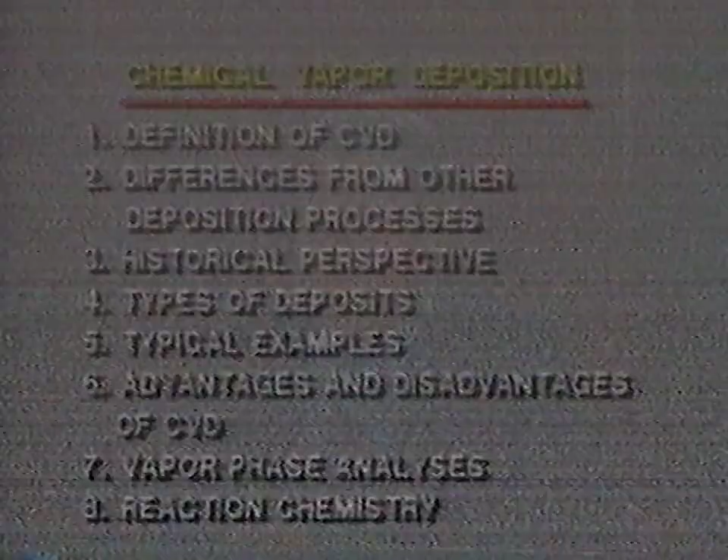Now, the types of deposits we can obtain by CVD cover a very wide range, as we will see. They can go from dielectrics to semiconductors, metals—it's a very large variety. Essentially, almost any type of inorganic material can be deposited by CVD methods.

The examples we will see in a moment, so let's skip to the advantages. Why would we want to use CVD? CVD is primarily a process where we can deposit materials at very low temperatures compared to their melting point. It's a very versatile method which allows the synthesis of many different types of compositions fairly readily and at low temperature.

The disadvantage with CVD is that we are restricted to materials that are available, that can be introduced into the gas phase and can be reacted. Another drawback is the fact that we have to use, in many cases, toxic materials which are corrosive, poisonous, and so on. So we have to have careful control over those processes.

In order to know what's really happening during the process, we have to do a vapor phase analysis. Simple analysis of the end product gives us some clues of what may happen during the process, but unless we do an in situ analysis using mass spectroscopy, Raman spectroscopy, optical techniques, and so on, we don't really know what is happening during the process itself. Instrumentation has been perfected in recent years to achieve that kind of understanding.

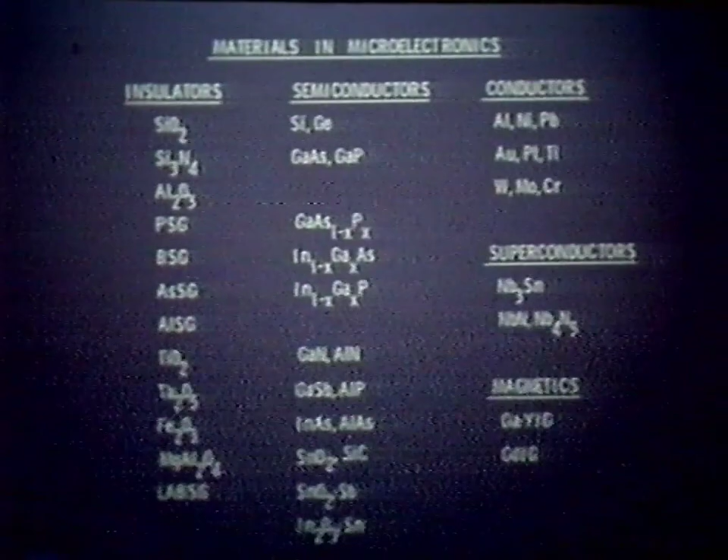The conductors generally are preferably done by physical methods of deposition, except the refractory metals—in this case tungsten, molybdenum—which are preferably done by the CVD method. The superconductors and magnetics, I'm just listing those for completeness, but they again are being prepared by CVD. Let's have a look at some of the basic aspects of CVD reactions as listed in this table.

First, the vapor pressure or volatility requirements are such that they should be high for the reactants, in order to transport them to the site of the reaction at the substrate surface. They should be high for side products to be eliminated, and of course low for the product to remain. This means gases are preferable in most cases, since you don't have vapor pressure problems, whereas with a liquid you have to vaporize it first, heating it to produce sufficient vapor pressure to get the necessary quantity into the reactor. If it's a solid, it's even more difficult, because you have to melt the solid to a liquid and transport the vapor through a heated conducting system into the reactor—sometimes difficult, but perhaps necessary if there's no other choice.

Now, the reaction energy under B: the types of reaction energy can be thermal energy, simple heating, as in most chemical reactions, or it can be an electric discharge such as a plasma glow discharge, or electromagnetic radiation such as electron flux, laser radiation, or photon radiation of any type. All of those are means to get the reaction going.

Under C, nucleation and film growth, there are two major aspects: homogeneous reactions, which occur uniformly in the gas phase—these are the ones we don't want, because they lead in most cases to gas phase nucleation of particles. The second type is heterogeneous reaction, which is selective and proceeds on the substrate surface, and that is the one we wish to control and obtain. We'll see more about these two reactions shortly.

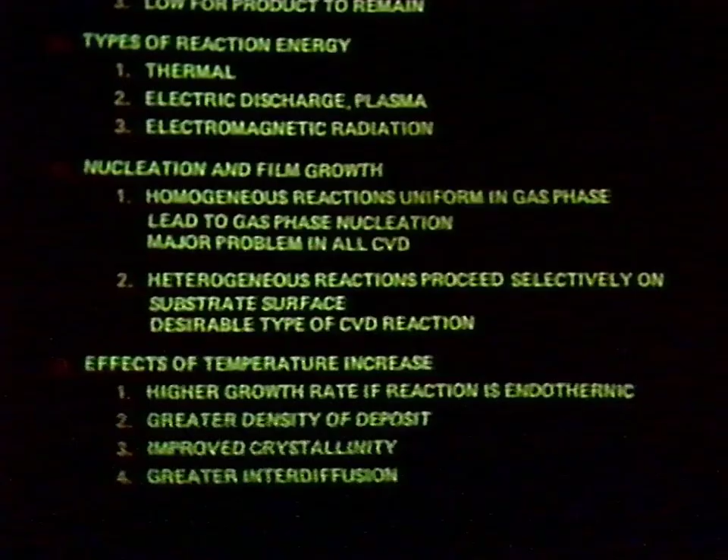Finally, the effect of temperature. Generally, a temperature increase produces a higher growth rate if the reaction is endothermic, as most chemical reactions would be. Greater density of the deposit also results from increased heating, and another effect is improved crystallinity. In epitaxy, for example, where we want a very good, perfect single crystal material, we have to go to a high enough temperature to achieve this. On the other hand, we also have negative problems such as greater interdiffusion, the diffusion of impurities, as we increase temperature.

Now let's look at some of the fundamental principles involved in CVD. They are listed here, starting with reaction chemistry—we will look at a few examples of those in a moment. The reaction chemistry is essentially straightforward inorganic physical chemistry without particular problems, except that everything takes place in the gas phase.

We have the gas-phase homogeneous reactions I just mentioned, and the surface heterogeneous reactions, which are the ones we really want. We can really say that the CVD method is more of a surface reaction method than a vapor phase reaction, because what we really want is the heterogeneous type of reaction, which occurs at the surface of the substrate.

The fourth thing is thermodynamics, and we will have a brief look at some thermodynamic considerations, then go on to kinetics and energy, mass, and momentum transport. All of these are very important in the reactions, in reactor design, and in maintaining conditions that lead to optimum results. Heat transfer is another consideration—from the substrate or from the reactor plate to the substrate, and also into the gaseous reactants of the system.

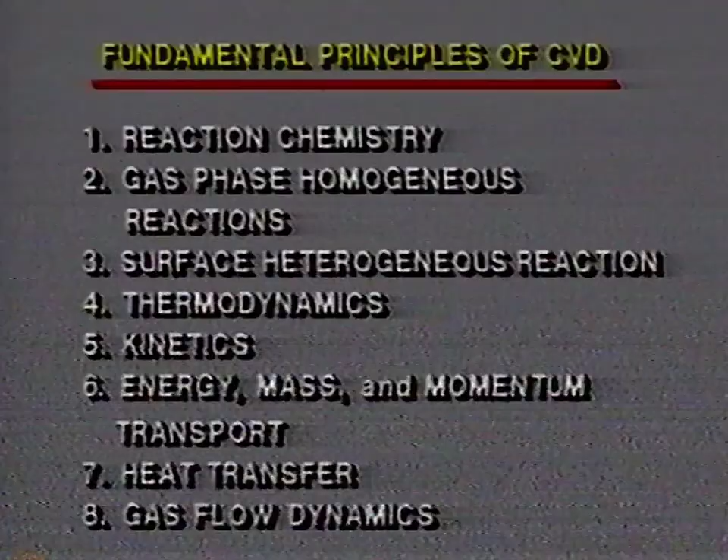Number 8, flow dynamics, is another consideration, as well as pressure effects—pressure, just like temperature, has a pronounced influence on deposition conditions. Nucleation phenomena are a whole separate aspect, a subcategory of the whole CVD theory. There are various aspects of film growth, that is, how the film deposits on substrates as a function of environmental parameters, and finally gas-phase composition analysis. Each of these could be a separate lecture, and to do justice to each it should be, but because of time requirements, we cannot cover more than the first four, or perhaps five, up to kinetics.

Pyrolysis is really a process which is thermal decomposition of a material without any other interaction. In other words, we simply heat silane, and we obtain silicon and hydrogen as a byproduct.

The next one would be reduction, used frequently for the preparation of metals. In this case, we have, for example, tungsten hexafluoride with hydrogen producing tungsten and HF as a byproduct.

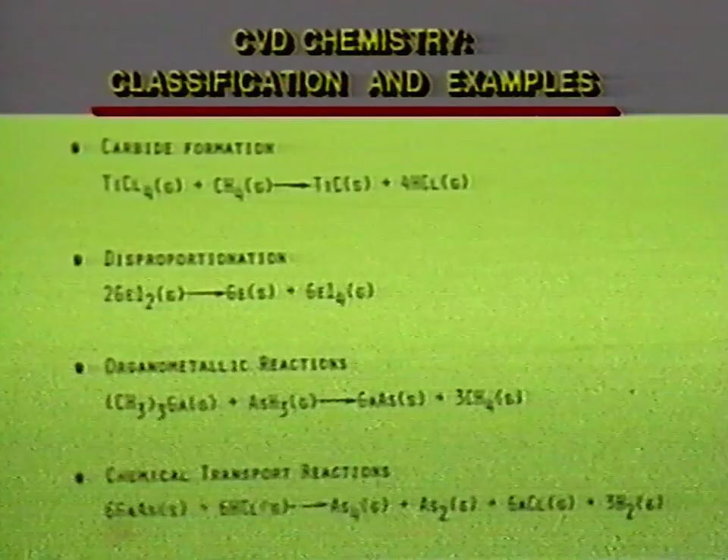Finally, transport reactions, where we transport one material with a suitable transporting agent, such as HCl or water vapor, into another. Here I have gallium arsenide shown with HCl to produce various species of arsenic and gallium chloride. Again, this is a reversible reaction and will depend on the temperature of the system which way it will proceed.

Let's have a closer look at the important homogeneous versus heterogeneous types of reactions using a very simple example, in this case the silane pyrolysis to silicon and hydrogen.

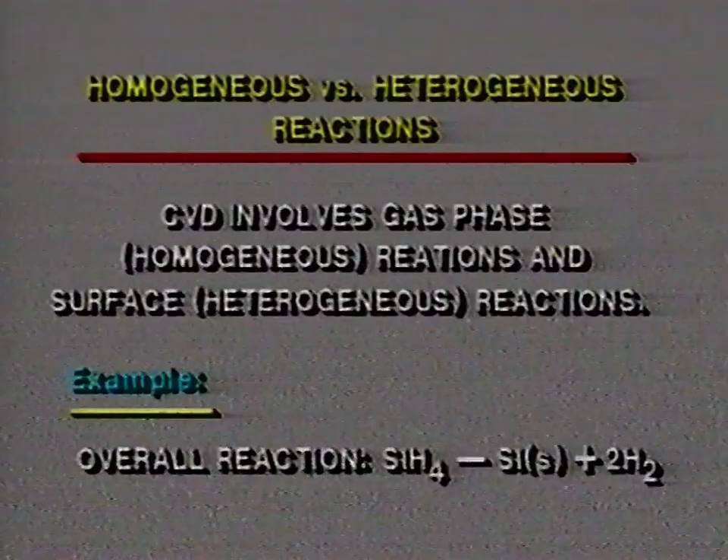We have essentially two types of possibilities: the gas phase reaction or the surface reaction. In the gas phase, silane dissociates to SiH2 and hydrogen, which then reacts further with silane to produce disilane, or Si2H6.

On the surface, on the other hand, we have silane depositing directly as elemental silicon and hydrogen, in all cases, whether it is silane or disilane or the more complex type. So these are the types of reactions which we would like to have, namely the deposition of film on the surface.

Incidentally, in all of this, we are really concerned with the deposition of thin films rather than anything else. And thin films meaning films in the range of a few hundred to a few thousand angstroms, up to perhaps a micron or so for VLSI type applications.

However, CVD can be used for production of bulk materials just as well. I just would like to point that out - it is not restricted to this. But the technology has been perfected to the greatest degree for thin film deposition as used in VLSI.

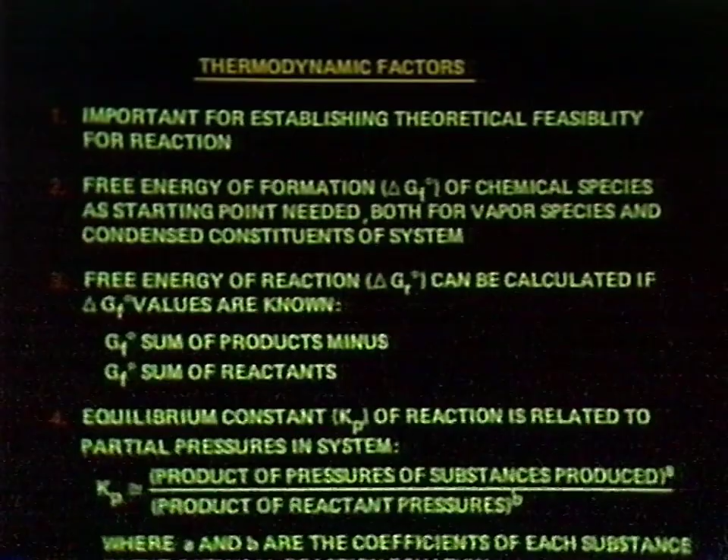The equilibrium constant K sub P of the reaction is related to the partial pressure of the system as shown here. K sub P essentially equals the product of the pressures of the substances produced, raised to the A power, divided by the product of the reactant pressures raised to the B power. A and B are the coefficients of each substance in the chemical reaction equation, the summary equation, as we normally do in physical chemistry.

The free energy of reaction, delta G sub R, and the equilibrium constant K sub P are related by the equation shown.

Consider a general CVD reaction, represented by the equation given here, where A sub G, a gaseous species, plus a species of reactant B, and so on, gives us reaction products M sub S and N sub G, and so on, but where only one of the components is a solid.

If that is the case, we can now calculate by means of the Van't Hoff expression, which relates K sub P, T, the absolute temperature, and delta H by the equation shown. Delta H, incidentally, is the enthalpy of reaction, which can be positive or negative.

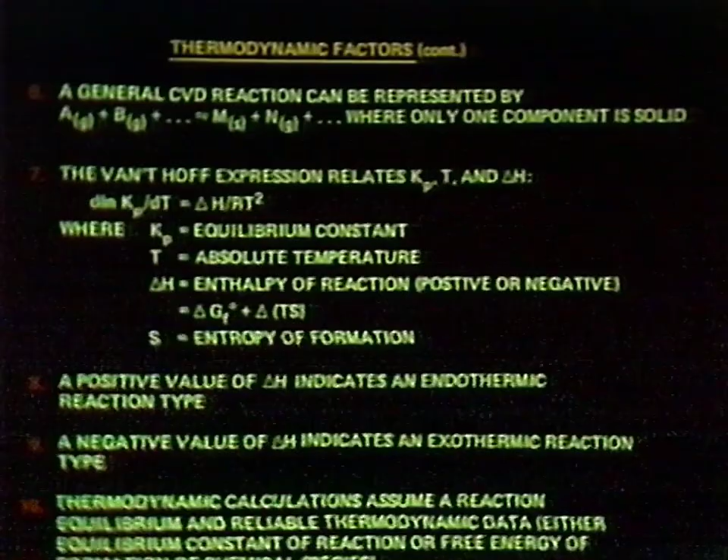The thermodynamic calculations assume a reaction equilibrium, and also assume thermodynamic availability of data, which is not always the case. CVD reactions are rarely, if ever, in full equilibrium, so it is quite an assumption one has to make. However, it does give us an initial starting point to see whether a reaction is feasible, or to what extent one can expect it to run.

So far for the thermodynamics in general. Now let's look at a specific example, a very simple example of how we can utilize the type of calculations I have just shown.

This will be for the selection of a reactor type using the Van't Hoff equation we just discussed. Let us assume delta H is negative and the absolute temperature is increasing. Then the sequence of events listed as A, B, C, and so on takes place.

K sub P decreases, the reaction shifts to the left of the equation, the deposit M sub S decreases, and the reaction would be considered exothermic. Therefore, a hot wall reactor will be needed to prevent deposition on the walls.

An example of this type of reaction is shown here, namely epitaxy of germanium by disproportionation, where germanium diiodide goes into germanium and germanium tetraiodide, with a delta H of minus 37 kilocalories per mole.

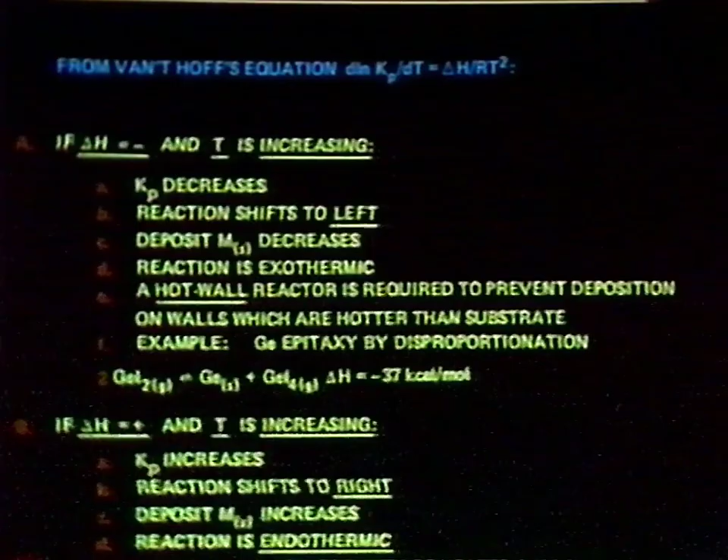Now, a second example with a very similar equation: epitaxy of germanium by reduction, in this case using germanium tetrachloride. Things are exactly opposite here. Let us assume delta H is positive and the absolute temperature is increasing, and the exact opposite sequence holds compared to what we discussed above.

As a result, we would have to use a cold wall reactor because the reaction is now endothermic, with an RF heated substrate, in order to have a selectively heated area rather than having everything else hot.

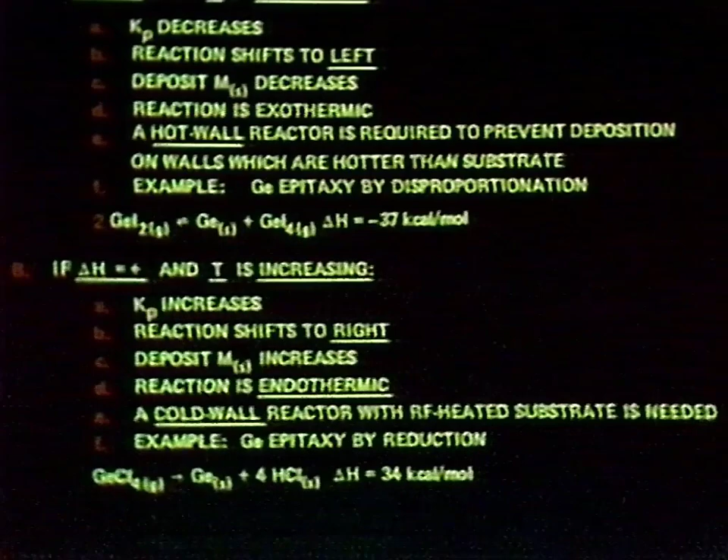This example shows that this reaction now takes place with a delta H of positive 34 kilocalories per mole, an absolute value very similar to the previous case, but opposite in sign.

Now, so far for the thermodynamic considerations. Let's look at the kinetics, which is really the other part that is very important, which will tell us how the reaction will proceed, assuming it will proceed, and to what extent it will take place.

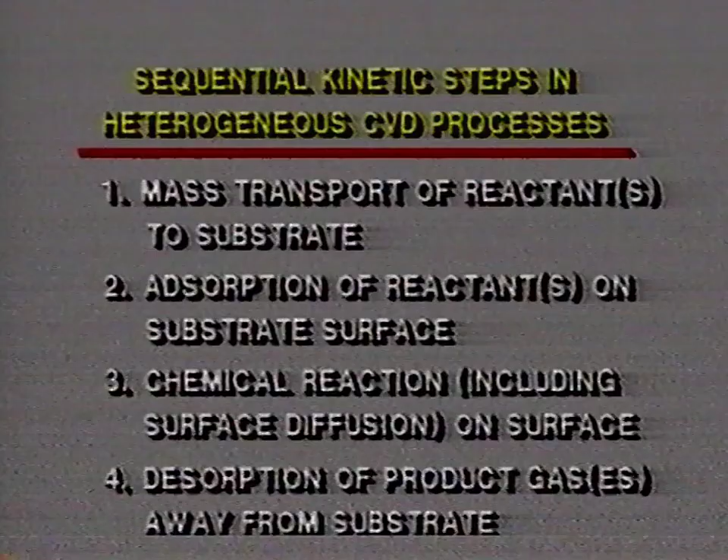Here we have essentially 5 types of steps. The first is mass transport of the reactants to the surface of the substrate, the first thing that has to occur. Then adsorption of the reactant species on the substrate surface. Number 3 is the reaction, which includes surface diffusion on the substrate itself. Number 4 is desorption of the side products, and finally the mass transport of the product gases away from the substrate.

One exception is epitaxy, because it involves epitaxial nucleation type phenomena that does not follow these steps. But other than that, all CVD reactions will follow this type of sequence, and of course the slowest step will determine the overall rate of the total reaction.

If we look at another aspect of kinetics, the temperature dependence, we look at the nature of the rate controlling step, which will change with temperature. Essentially we have 2 types: one at lower temperature, which is a surface process controlled by exponential temperature dependence, and one at higher temperature, which is usually diffusion controlled, a diffusion type process with a mild temperature dependence, as we will see on the next slide.

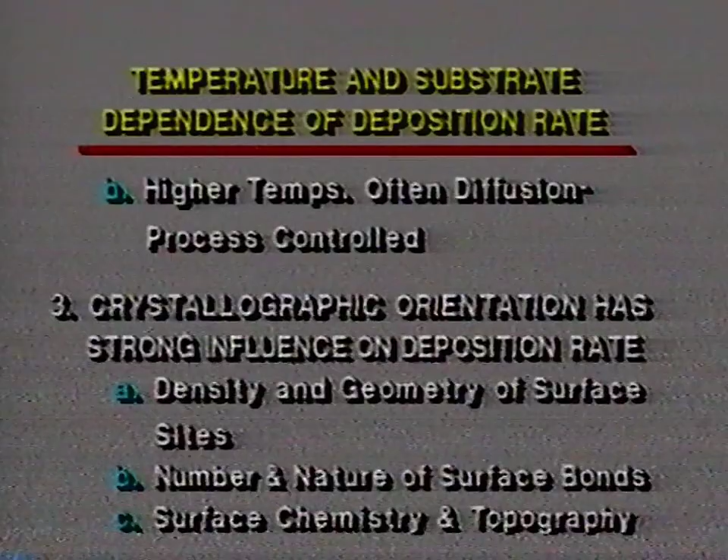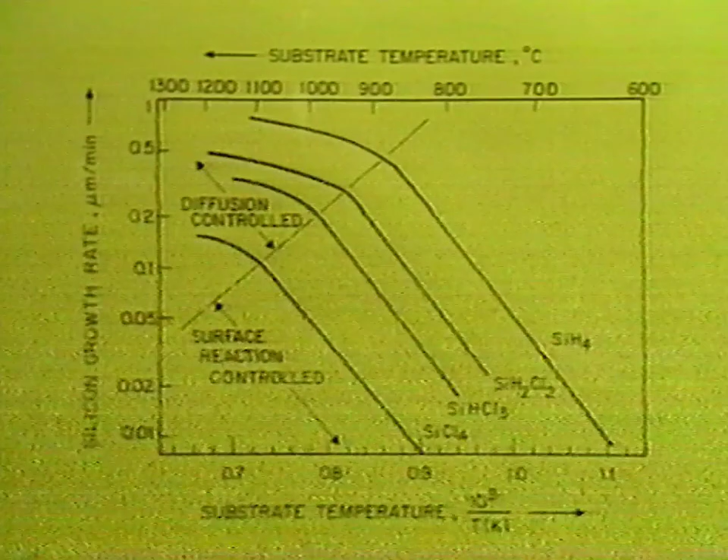However, we definitely see 2 types of curves: a very steep one going from right to left, which is the lower temperature type process with exponential temperature dependence, very sensitive to temperature, then it reaches a knee on the upper part and levels off. So all the curves level off at the higher temperature end, which are the diffusion type processes, not influenced to any great degree by temperature. That is a very general type of behavior that holds for most of these processes.

Now, another aspect we should consider is the LPCVD system, the low pressure CVD, as compared to atmospheric pressure CVD. I have attempted to put this into words, and afterwards we'll have a look at the mathematical equations that govern the processes of this type.

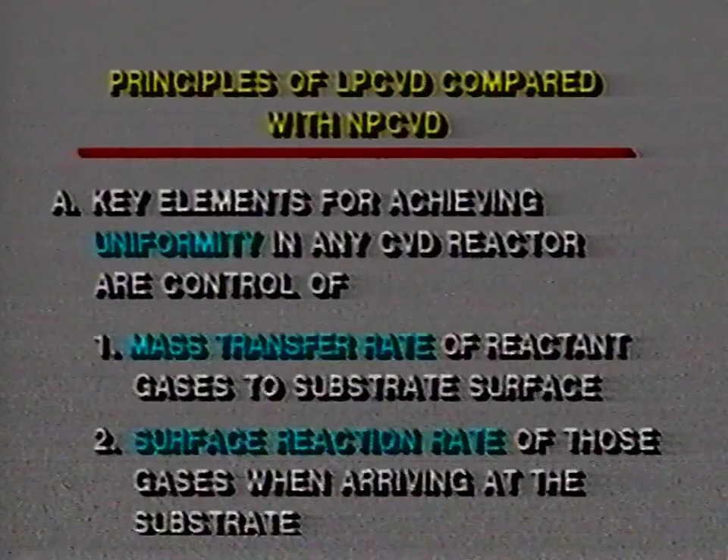Let's go down this list briefly, starting with A: a key parameter for achieving any type of CVD film is uniformity. The control of uniformity is based essentially on, number 1 and 2, the mass transfer rate of the reactant gases to the substrate surface, which has to be controlled, and the surface reaction rate of those gases once they have arrived at the surface and interact. In normal pressure or atmospheric pressure CVD, the mass transfer and surface reaction rates are essentially the same, or at least in the same order of magnitude.

If the substrates lay side by side in a reaction tube for good uniformity, as was done before LPCVD processing was developed, it is necessary to lay them side by side flat in the tube to get good uniformity. If we stand them up, as we now do in LPCVD, but used normal pressure CVD for vertical closely-spaced substrates, the mass transfer rate to the surface would be much smaller than the surface reaction rate and cause an edge buildup. In other words, we could not operate at atmospheric pressure with vertical closely-spaced substrate wafers.

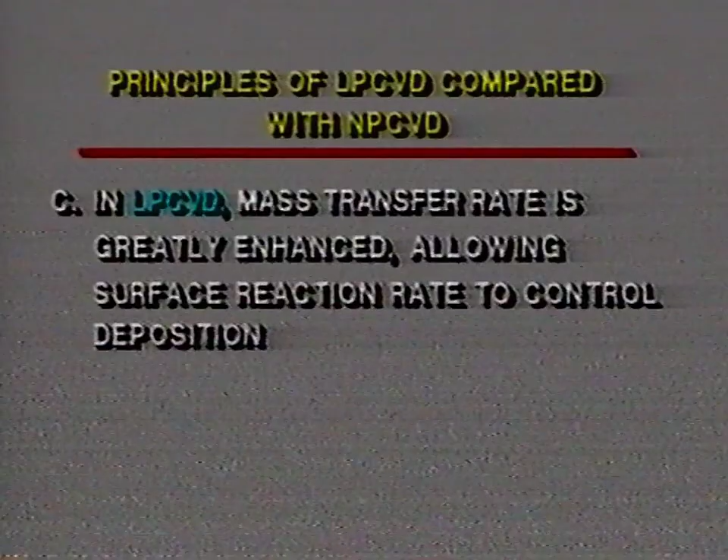In LPCVD, shown here, the mass transfer rate is greatly enhanced, allowing the surface reaction rate to control the deposition. Vertical closely-spaced substrates are uniformly coated as a result, but it still perhaps isn't clear why. Let's examine this in more detail under D: the mass transfer of gases involves the rate-controlling diffusion across a slow-moving boundary layer, which is always present above the substrate itself. This boundary layer is the limiting factor here, and the transfer of gases through this stagnant boundary layer above the surface is a very important aspect.

Under E, the mass transfer rate now depends on a number of things, namely the reactant concentration, the boundary layer thickness, and the diffusivity of the reactant gas or gas mixture through that layer. The surface reaction rate, on the other hand, depends on the reactant concentration and the temperature only.

Now, if you lower the pressure by a factor of 1,000, let's say from atmospheric 760 torr, what happens is the diffusivity increases by 1,000, and the laminar boundary layer increases by a factor of 10, and the mass transfer therefore increases by a factor of 100 because of these two factors. Of course, the mean free path is increased as a result, and as a result of all this, the uniformity of the film deposit is greatly increased.

Now, if we look very briefly at low pressure CVD compared with atmospheric pressure CVD, essentially what I just went through, but putting it into more concise terms, looking at the numerical values, we start off with atmospheric pressure CVD at let's say 1,000 torr pressure, and see what happens as we decrease the pressure to 1 torr.

We can see what happens to the various factors here: the change of diffusivity from 1 to 1,000, and the velocity change, density change, and also the change of the Reynolds number, defined in this equation.

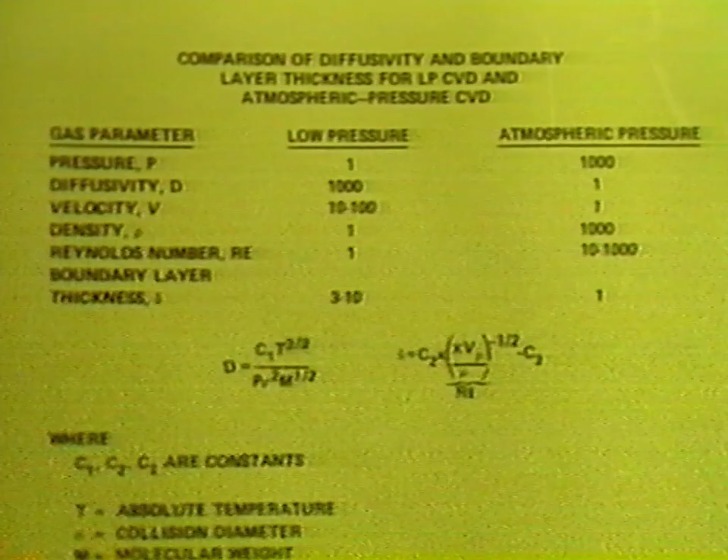And we can also see the thickness of the boundary layer changing from a value of, say, 1 to a value of 3 to 10. In other words, the thickness of the layer actually increases because the boundary layer, the stagnant layer, becomes diluted out. So you have an expansion of that layer.

However, the diffusivity changes to a very large extent because the diffusivity through that layer, since it is expanded, is greatly different from what we have under atmospheric pressure conditions for the various gas species.

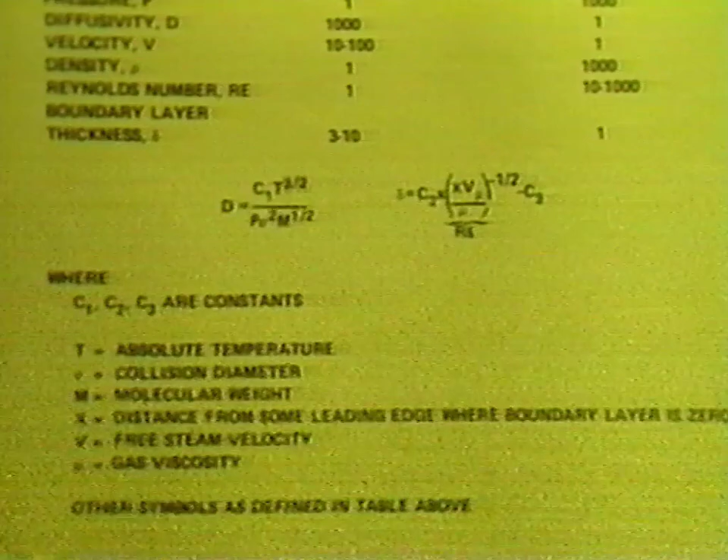And of course, the boundary layer thickness is defined in this equation, where the Reynolds number is part of the expression. The terms are detailed down here to specify exactly what is meant by the various terms.

We are still considering various fundamental aspects of CVD. One thing we have to consider here next is plasma CVD. There are various forms of CVD, and even though plasma might generally be considered a separate subject, plasma CVD reactions are part of the overall CVD processes and should be considered as such. So let us have a quick look at the types of plasmas and reactions that occur.

Here we have electrons which essentially gain energy from impulsed electric fields, transfer that energy kinetically to reactant molecules, and in the process produce a large variety of free radicals, atoms, metastable species, excited molecules, photons, and so on, which then interact and form film materials.

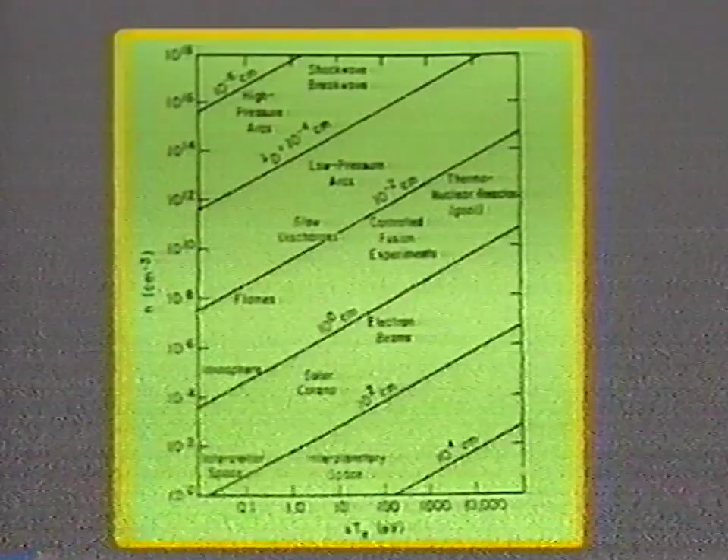Now, another aspect, another reaction type, another technology really is photo-CVD. And here, the principle of reaction is the selective absorption of photonic energy to initiate deposition processes.

In many cases, mercury is used as the transfer agent of energy. Mercury vapor is used as the photosensitizer, for example, for certain gas-phase reactions. In this case, a mercury resonance lamp is used, which operates at 2537 angstroms to serve as an irradiation source to activate the mercury from the ground state to the excited state, which then transfers energy by collision to reactants in the gas phase, producing various types of films.

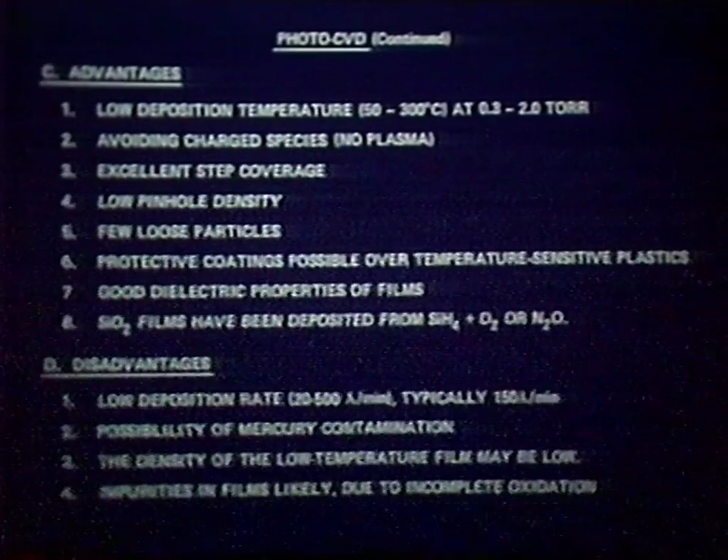Now, the advantages of photo-CVD are listed here. We can use low temperatures of deposition, such as 50 to 300 degrees centigrade, at a pressure range of 0.3 to 2 torr. We avoid charged species, which is one of the main advantages, unlike the case in plasma, where we do have charged species, that is, we have irradiation effects. We have excellent step coverage that results from photo-CVD, low pinhole density in the films, few loose particles, and so on.

And because of the low temperature, we can use this type of process for the deposition even over plastic materials, which could not be done readily by any other means.

There are some disadvantages that are listed here, namely the deposition rate is somewhat low compared to atmospheric pressure CVD. It is okay compared to LPCVD, about 150 angstroms per minute, which is reasonable.

Nevertheless, the mercury contamination is one aspect. We do get some mercury trapped in the films, even though in very small quantities, maybe 10 to the 16th or less. But it is a definite disadvantage for use of this type of reaction for CVD applications in VLSI.

There are ways to get around it. We can use different kinds of reactants that are more sensitive, such as disilane, for example, or we can use a higher frequency type of ultraviolet that is more intense. But there are problems still associated with that type of process.

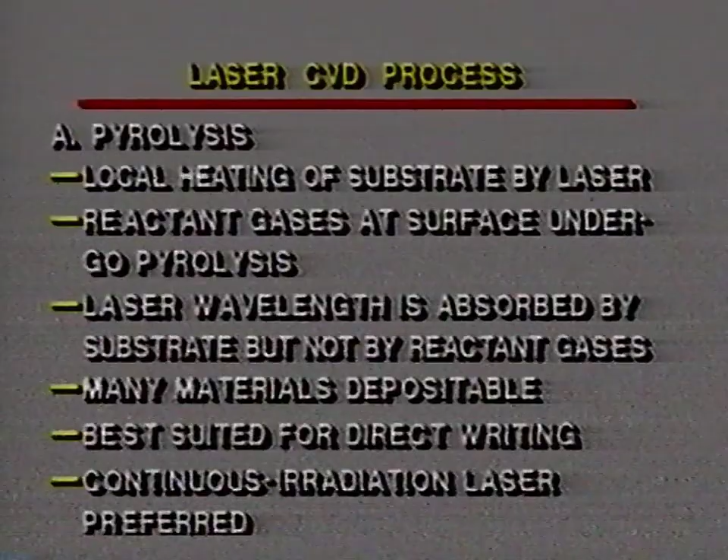The third type is photolysis. This is very similar to the photo-CVD reaction just discussed. Here, the laser is absorbed by gaseous reactants in a single or multiple photon process, and the absorption leaves donor molecules in an excited state that can interact, and byproducts of the photodissociation then lead to new kinds of films.

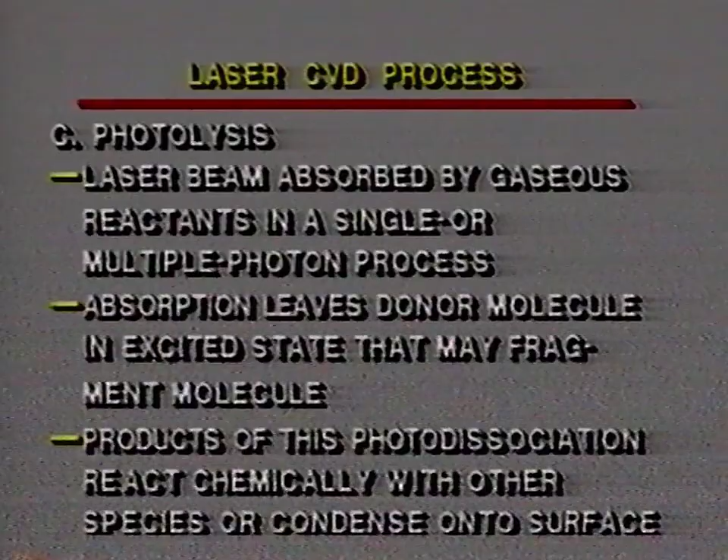This is perhaps the most interesting type of process, because we have to select the laser wavelength to match the reactant species—they have to be tuned. If that is achieved, you have a very selective reaction, so that there are no other side products or side reactions taking place except for that one specific reaction which proceeds. So you have the possibility of doing a very selective and highly controlled type of reaction.

So far for the basics. Now a few words about reactor systems.

Essentially, we can divide the reactor systems into low temperature reactors, namely those operating below 500 degrees centigrade. These are the horizontal displacement type flow reactors, used widely in industry for the deposition of oxide and glass films. We also have vertical reactor systems which operate in a batch type operation.

Let me just go down the list here: horizontal displacement flow reactors, or the vertical rotary batch reactors. These are the relatively simple type of hot plate reactors where a batch of wafers is positioned and then deposited on.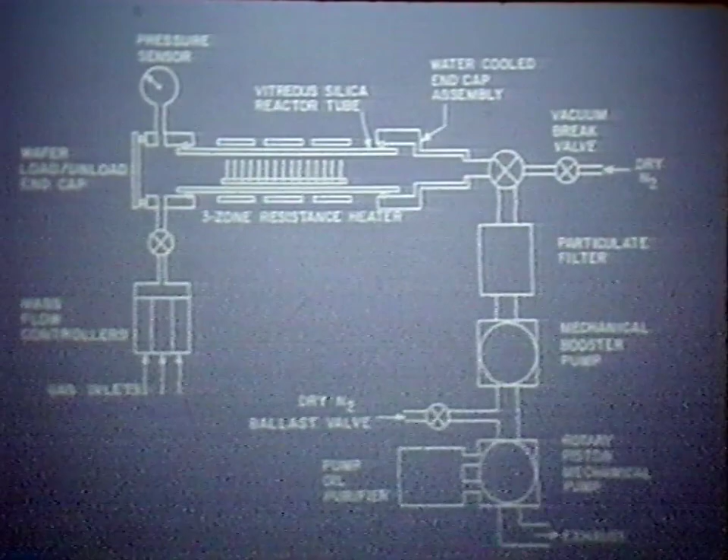This is a typical tubular type LPCVD system. Looking at the diagram, the heart of the reactor is the tube, which is essentially a diffusion type quartz tube where wafers stand vertically in boats, spaced a few millimeters to a centimeter apart, depending on the reaction. The latest CVD systems of this sort may have a capacity of 100, 200, or more wafers, up to 3, 4, or even 6 inches in size.

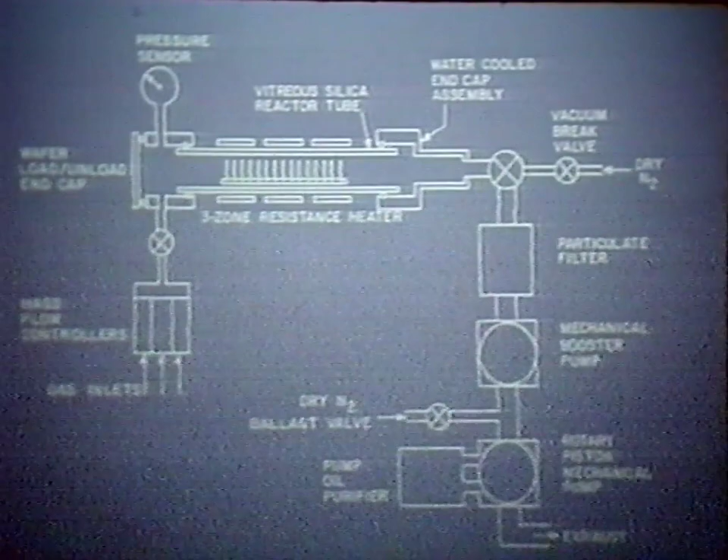The gases come in and are metered into the system. There's a pressure gauge to tell us the pressure of the reactor. The gas passes through the tube and finally exits through the end, where we have a particulate filter to eliminate contaminants so they don't get into the pump.

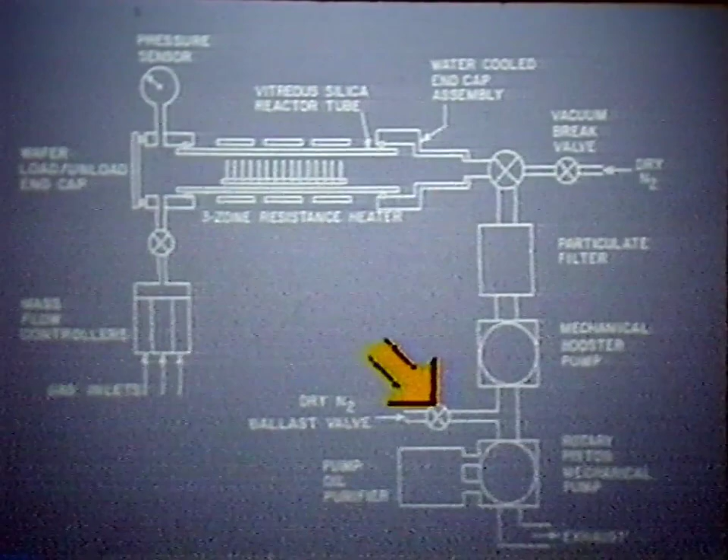Here we have a mechanical booster pump and a rotary piston pump, which is a typical mechanical type pump. We also have a configuration with a dry nitrogen inlet that prevents back diffusion of oil into the system. So that's a very typical type of system.

Now the LPCVD can be modified to have plasma capabilities, in which case we have plasma reactors, tubular type plasma reactors.

One other type of reactor to look at before we finish this segment is the photo-CVD reactor. Here the wafers are located as shown, heated to a temperature of perhaps 100 to 150 degrees centigrade. Gases are introduced over the surface of a mercury bubbler, sufficient to pick up enough mercury vapor to react in the gas phase.

Usually some or all of the gas is passed through the container holding mercury, picking up enough vapor to introduce mercury into the reactant space. In this case we have a fairly closed space with a quartz plate close to the substrate surface, and ultraviolet lamps positioned above in as close proximity to the substrate as possible, producing the radiation needed for the reaction to take place.

After the reactions are completed, the gas passes down the tube through the exit. We don't yet have any production type reactors based on this system, but several companies have plans to remedy this, and shortly we will see a production system that hopefully meets the demands of large throughput and controllability, which we don't have available as yet.

In the last slide, we have a view of a typical laser type CVD system, where we can see two types of reaction possibilities. We can have a surface reaction taking place by the laser coming in vertically from above, passing through a number of optical filters, to hit the substrate, in this case a silicon substrate, which would be normal to the incidence of the laser.

On the other hand, we can also have the laser coming from the left side, parallel to the substrate, going from left to right, and the gases would be passed over the surface of the substrate and react there. So we have these two types of configurations.

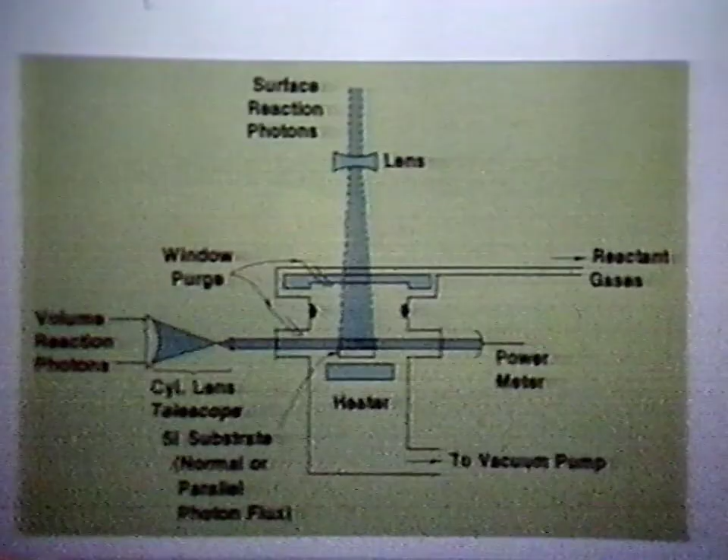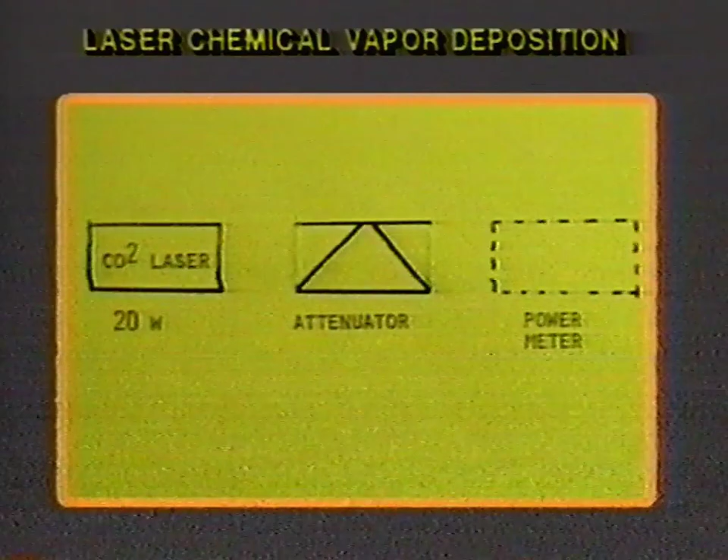Perhaps the last slide here, we can look at laser chemical CVD. We have a CO2 laser, typically 20 watts, going through an attenuator, power meter, shutter, and so on, all the way to the cell where the reaction takes place. You can see the laser beam coming to the surface, heating selectively the surface of the substrate, and the reaction takes place there.

In the second part we will discuss the various types of films that are deposited by CVD and show you some of the processes involved in that.

This is the second half of the lecture on CVD. As you remember, the first half covered essentially some of the fundamental principles, the CVD processes and technologies associated with CVD for VLSI as we need them today, and had a brief look at the reactor systems. We are now proceeding to the second part, which is the deposition of specific materials.

Here I have taken the oxides, silicates, and nitrides as the most important examples for dielectrics. We'll then look at the CVD of some of the semiconductors, in which case amorphous and polycrystalline silicon will be discussed. And finally, we'll go to the deposition of conductors, and here I have selected aluminum, tungsten, and silicides as the most important ones. Then at that point, we'll reach some overall conclusions for CVD in general.

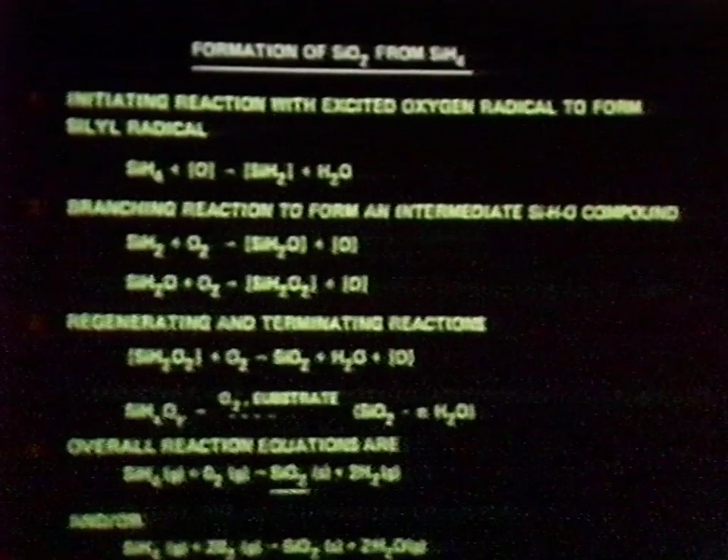If we look at the reactions occurring in the formation of SiO2 from silane, we can list them as shown here. We start with the initiation reaction with excited oxygen radicals that form the silyl radical as indicated.

Now you can see that the simple reactions I showed you to begin with are really a lot more complicated than the summary equations indicate, because we have a series of free radicals forming which then interact, and in a whole sequence of interactions finally produce the desired product.

The next step after this initiation reaction is a branching type of reaction which forms a number of intermediates such as SiHO compounds.

That's shown here, where we have the silyl now reacting with oxygen to form SiH2O plus oxygen, as well as the interaction of that intermediate with additional oxygen to give us SiH2O2. After this branching reaction, we have a regeneration reaction and also a terminating reaction, where the product formed interacts with additional oxygen to form SiO2 and water vapor.

And the interaction takes place, as expected, on the substrate of the silicon itself. That is, usually an adsorption of oxygen on the substrate surface, which then interacts with the intermediates formed, as shown above.

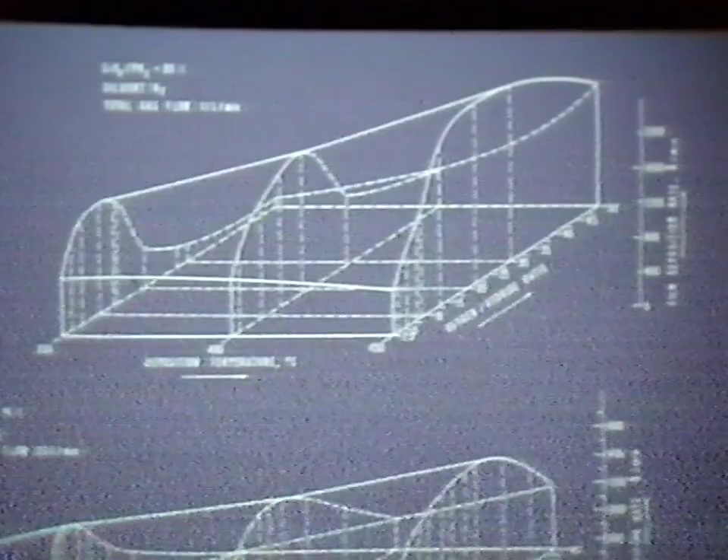To make sure this is not a peculiarity of the particular deposition system used, I took data from the literature and superimposed them. These data are from a Japanese report, where they did a similar kind of thing, and I plotted the data the same way. You can see we extend them to 300 degrees C, and the same behavior takes place almost quantitatively.

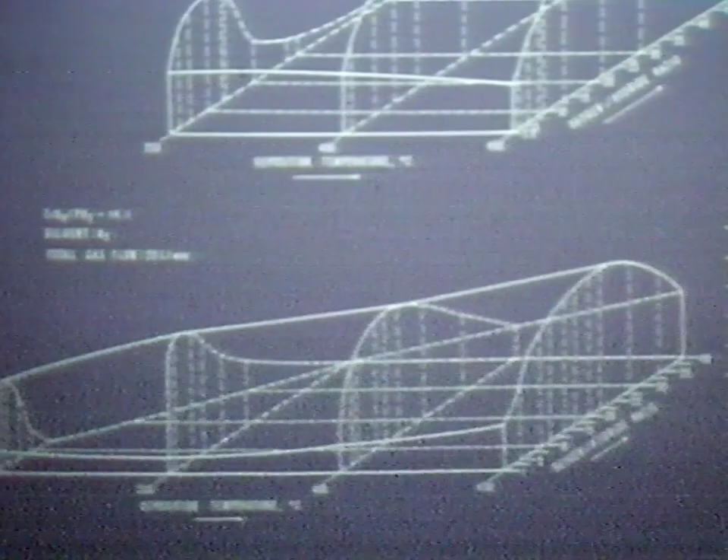Even using somewhat different conditions and different reactor types, we still get the same type of configuration. That is a very clear indication of oxygen inhibition if we have too much oxygen there, which holds for the silane oxidation for oxide, as well as the doped case of the PSG.

If we look at the same kind of data now, but in terms of composition rather than deposition rate, shown over here, the composition in terms of phosphorus content is shown in the vertical bars. Very briefly, we can see what happens here.

The solid data are the ones we generated in our own laboratory at RCA. The dotted ones are from the literature. You can see we have a similar kind of behavior. As the temperature increases from left to right, we have a decrease in the film concentration of phosphorus.

As the temperature goes up, the phosphorus concentration goes down. As the deposition temperature increases, the phosphorus content of the film decreases. That has mainly to do with the high vapor pressure of P2O5, which is the intermediate formed in the process of co-oxidation of silane and phosphine.

Okay, so far for that. We have to be very well aware of the effect of temperature, that if we change the temperature in many of these processes, it is not simply a matter of changing the rate of deposition. We may change the composition of the film, and there may be other effects that have to be kept in mind.

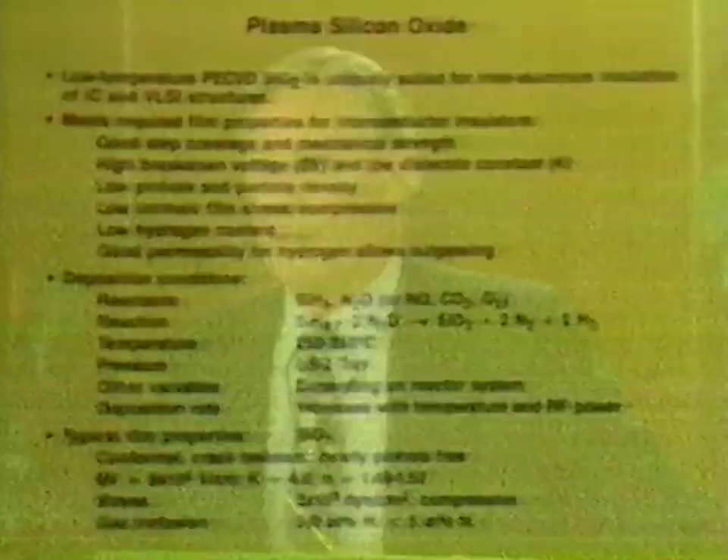Now we have a look at some other types of films, or at least films done by different techniques. To begin with, the plasma oxide, which is really a low temperature SiO2 especially well suited for deposition over aluminum metallization, where the temperature has to be kept very low. By very low temperature, I mean something like 300 degrees C or even less, in order to avoid or eliminate recrystallization of aluminum and the formation of spikes and shorts and that kind of thing.

Listed here are a number of factors. The films produced have high breakdown strength, have good dielectric properties, and meet the requirements that are needed for applications such as interlevel insulation between aluminum layers.

Also, they do have some hydrogen, but the hydrogen tends to diffuse out very readily since the films are permeable to hydrogen. Deposition conditions are listed here. We use typically silane and nitrous oxide, or as an alternative, nitric oxide, CO2 or oxygen. Any one of those, but generally nitrous oxide is probably the most frequently used oxidant species.

The reaction taking place is shown there with, again, a summary reaction that looks very simple, even though it is really quite complex. The temperature range is 250 to 350 degrees centigrade, but the temperature, of course, in plasma reactions is not the primary thing. It's the plasma that drives the reaction, so the substrate temperature is really only utilized to produce better film qualities, like higher density and less gas absorption, that kind of thing.

The films are conformal, they are crack resistant, practically pinhole free, and with very good breakdown voltage and dielectric constant as shown, and also refractive index, indicating that the quality of the film is indeed quite high. The stress, of course, is in most cases compressive, and that's another good feature. It is on the order of 1 to 2 times 10 to the 9 dynes per square centimeter compressive, which is a very good level that is desirable. And the gas inclusion is shown down here, 2 to 9% atomic hydrogen and some nitrogen, which, however, produces no problem in its application.

Now, the second type of film produced by plasma reactions is the plasma nitride, and this is probably the most important one of the plasma films.

It was the first material that was deposited by plasma techniques and really got things going in the whole field of plasma deposition, because the nitride deposited by plasma reactions can be done at a very low temperature.

It still has properties similar to the high temperature nitride, namely protection against sodium ion diffusion, and that, of course, is the main application of these films.

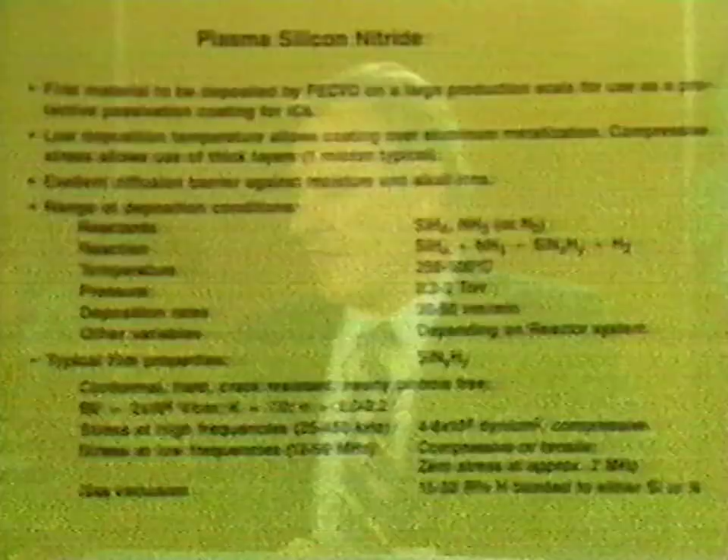As indicated here, the low temperature of deposition allows the use of aluminum metallization, which would be impossible if we would use the high temperature Si3N4 type nitride.

Also, because of the compressive stress in the films, it is possible to build up layers to a thickness of a micron or 2 microns even without cracking.

And just like the high temperature nitride, plasma nitride is an excellent diffusion barrier against moisture and alkali ions, as I had already mentioned. The reaction conditions are listed here.

We can use either silane and ammonia, or silane and nitrogen as the nitrogen source. The reaction is indicated there. If we use nitrogen, it is more difficult to dissociate a nitrogen molecule than it is to dissociate the ammonia molecule.

So the rates of reaction are lower, deposition rates tend to be lower, and as a result, one prefers in practice the use of ammonia as the source of nitrogen.

Temperature, as I said, the temperature range is not critical. Pressure of 0.2 to 3 torr is used in that range.

Deposition rates are typically 300 to 500 angstroms per minute, depending on reactor systems. The variables, of course, will vary from system type to system type.

But the typical film properties are summarized here. Again, just like the plasma oxide films, they are conformal.

These films are conformal, hard, crack resistant, nearly pinhole free, with very good breakdown strength and a dielectric constant of about 7, and a refractive index of 2.0 to 2.2.

And the stress, as I indicated, is typically compressive. However, there is a variation depending on the type of frequency used for the reactor.

In the range of 25 to 450 kilohertz, the stress is typically in the range of 4 to 8 times 10 to the 9th dynes per square centimeter.

Compressive, very compressive, more so than we would like to see, because that will cause problems later on in its application. If we have a frequency in the range of...

13 to 56 megahertz, then the stress can be compressive or tensile, and we observe it as essentially zero stress at approximately 2 megahertz.

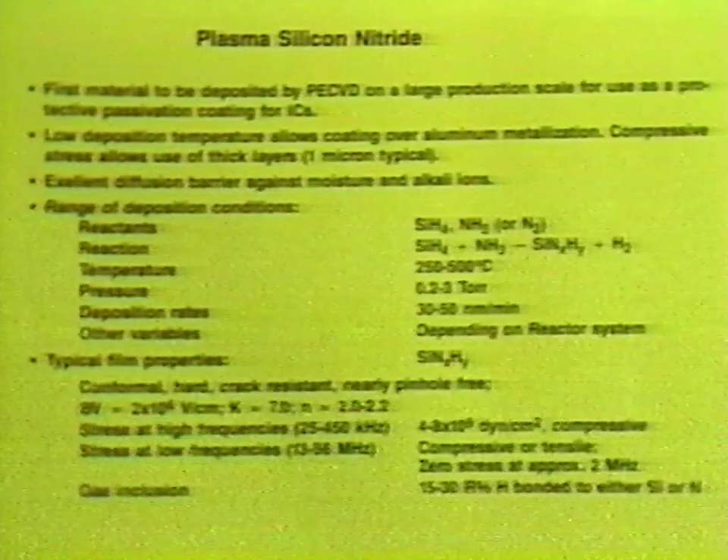So as you can see, the properties of the film, especially stress, are dependent on certain parameters. Frequency is only one, but there are other ones that determine the type of stress one will obtain.

Gas inclusion here is mainly hydrogen, which may be from 15 to 30% bonded to either silicon or nitrogen. That will produce a problem of outgassing later on, which may cause blistering of the film and effects on device performance. So hydrogen is a very undesirable situation in the case of plasma nitrides.

So far for the dielectrics. Now we have a look at the semiconductors.

And of course, semiconductors really are a whole range. We should really consider elemental semiconductors as well as compound semiconductors, but in this particular presentation we have to essentially concentrate on the elemental ones here, because there just isn't enough time to cover all this kind of material.

So let's have a look at the type of reactions that can be used for the production of silicon and also germanium. To begin with here, we have seen that reaction before a few times already.

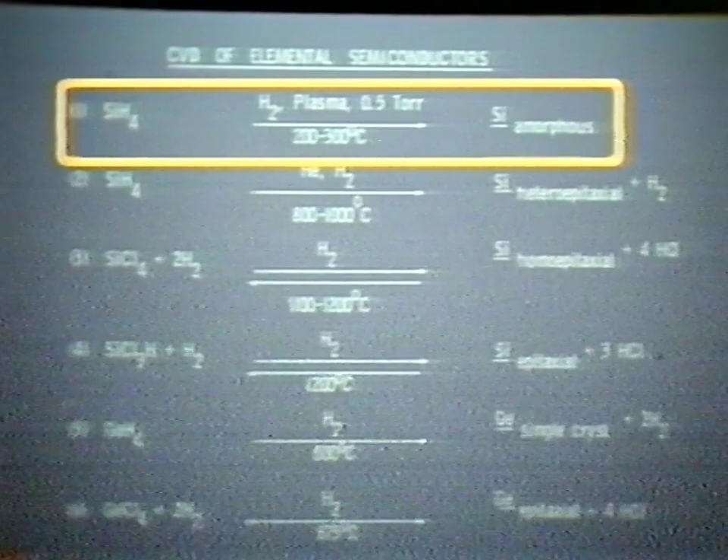Thermal dissociation of silane in a plasma discharge can produce amorphous silicon at a very low temperature, like 200 to 300 degrees centigrade. Or we can use the reaction listed here, the simple dissociation or pyrolysis reaction at 800 to 1000 degrees C, to produce heteroepitaxial silicon.

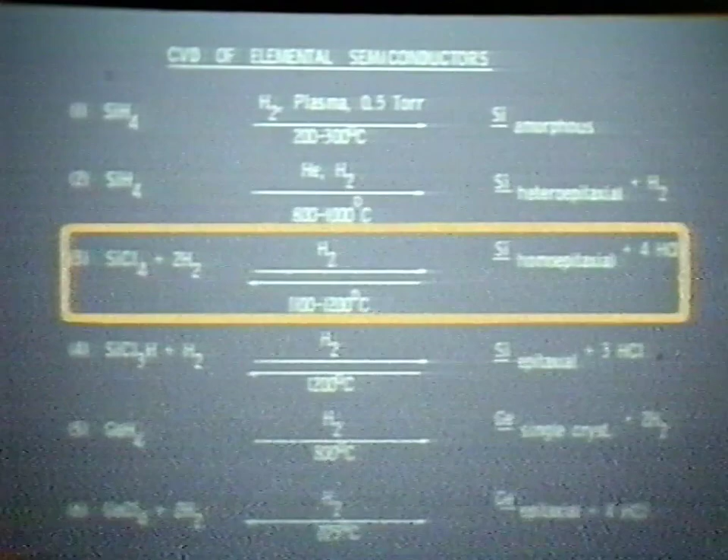That is silicon that would be produced, for example, on sapphire, where we cannot use reactions containing chlorine that would attack the substrate. Here, in this case, where we have a silicon substrate and want to produce a homoepitaxial film of silicon, we can use chlorosilanes.

Such as tetrachlorosilane, trichlorosilane, or dichlorosilane. Any one of those silanes can be used to produce epitaxial films of silicon.

The germanium species are analogous in principle to the silicon ones. Germane reacts just like silane would.

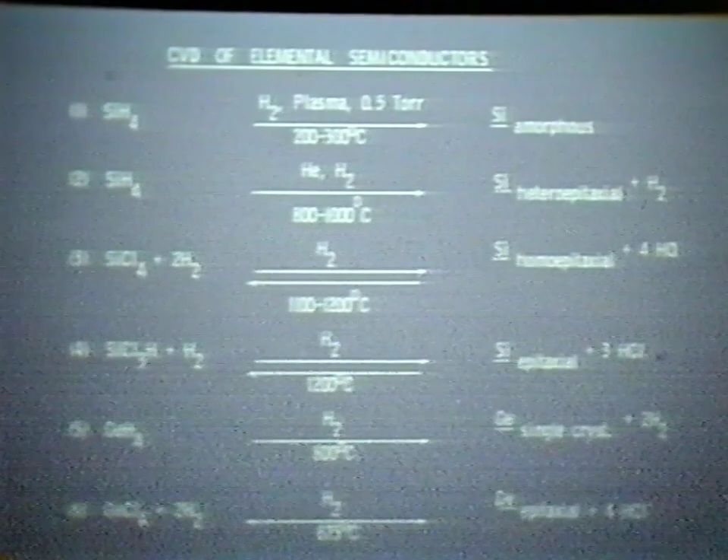Generally at an even lower temperature, and germanium tetrachloride again can be used for the production of germanium epitaxial layers.

Very readily. So this gives you a brief overview. Now let's go to the ones that are perhaps the most important in terms of VLSI applications and have a closer look at these, namely the amorphous and polycrystalline silicon types.

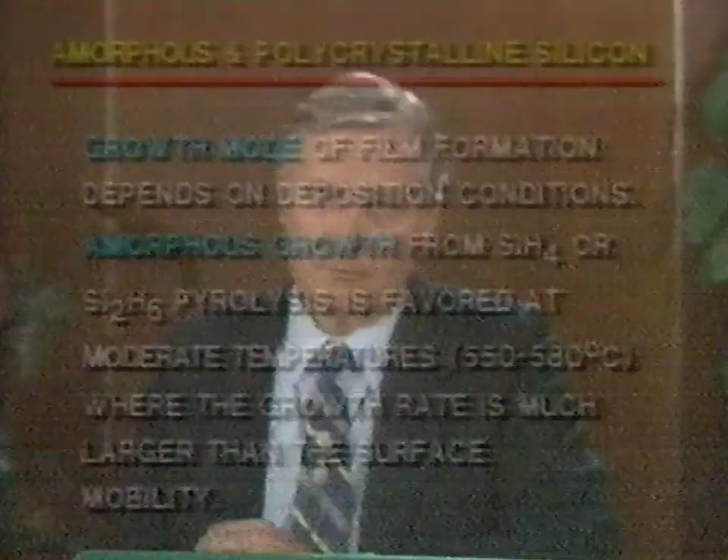I have listed the key features in each case here. The growth mode of the film formation depends very much on deposition conditions. Namely, the amorphous type of film from silane or disilane pyrolysis is favored generally at a moderate temperature in the range of about 550 to 580 degrees centigrade. In this case, the film growth rate is much larger than the surface mobility of the atoms at the substrate surface, so as a result, you have an amorphous type film forming.

In the second case, LPCVD of amorphous silicon has low growth rates, primarily because it is an LPCVD reaction. But if followed by recrystallization, it nevertheless has advantages in the control of polycrystalline structures of the film, and the formation of even epitaxial silicon films on insulators if you go to high enough temperatures. So even though the rates are low, there are definite advantages using LPCVD for polysilicon formation.

Now the plasma-enhanced CVD, or plasma-assisted CVD, for silicon deposition will produce a hydrogenated amorphous silicon, produced at fairly high rates and at low temperatures. The hydrogen content varies strongly with plasma conditions, reactants, and other factors, but especially the temperature. As the temperature increases, there is less hydrogen being included. This type of film is used for photovoltaic applications primarily, where the hydrogen, as an exception, is a beneficial effect. Namely, it will passivate dangling bonds and produce very desirable effects in solar cell applications, where amorphous silicon is used very widely.

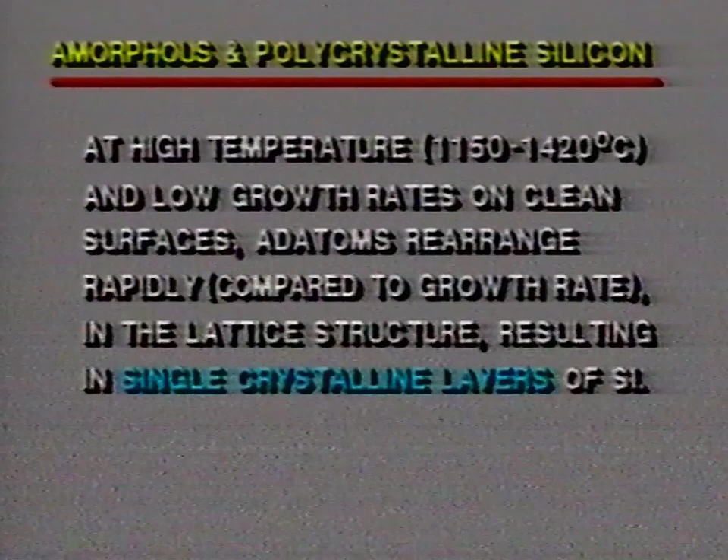Now, if you go to very high temperatures, such as 1150 to 1420 degrees C, and low growth rates, assuming you have a clean substrate surface, adatoms rearrange very rapidly compared to the growth rate in the structure that's being formed, which will then result in the single crystalline formation of silicon films.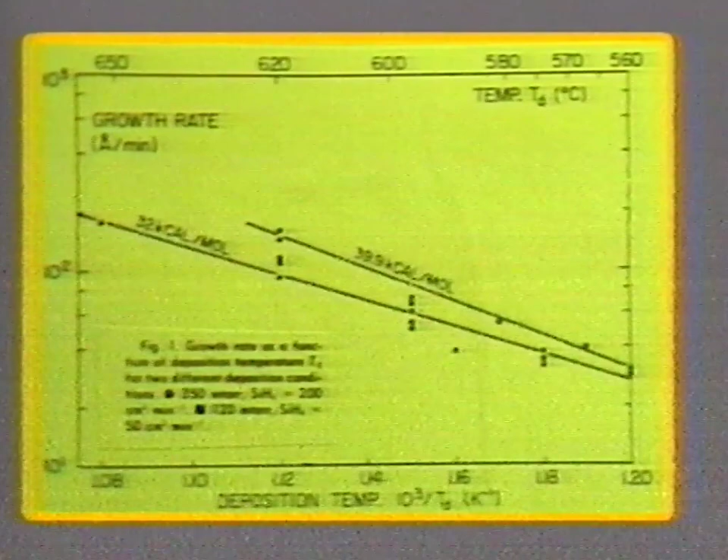Typical deposition rates are in the range of about 100 angstroms per minute. The temperature range used for the amorphous type film is up to about 580, and the higher temperatures are used for polycrystalline film formation.

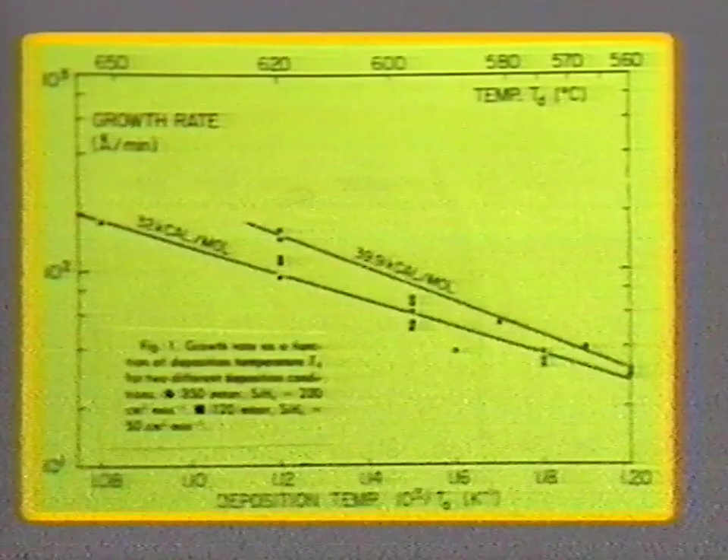Well, I think we'll go right on to the conductive materials at this point, because the third type of material we're concerned with is the deposition of conducting materials by CVD. I don't think I have to stress the importance of conducting materials in LPCVD, in VLSI applications. We can deposit both elemental metals and alloys, and as I mentioned before, tungsten and molybdenum are particularly attractive because they are difficult to deposit by physical means of deposition.

Also, the refractory metal silicides have become very important, and they're listed here. There are other compounds like transparent conductors, which are really non-stoichiometric oxide semiconductors, such as tin oxide. Again, they can be done by CVD very well, as can superconductors like niobium tin and so on. And then, of course, there are other materials not used in VLSI, but that can be readily formed by a number of CVD reactions.

Now, aluminum, in the past, and even up to this point, is deposited for VLSI applications primarily by sputtering and evaporation, by physical methods. However, the use of LPCVD has been optimized because there are some definite advantages using CVD rather than deposition methods based on physical principles, mainly because of the feasibility to obtain conformal coverage of the structure.

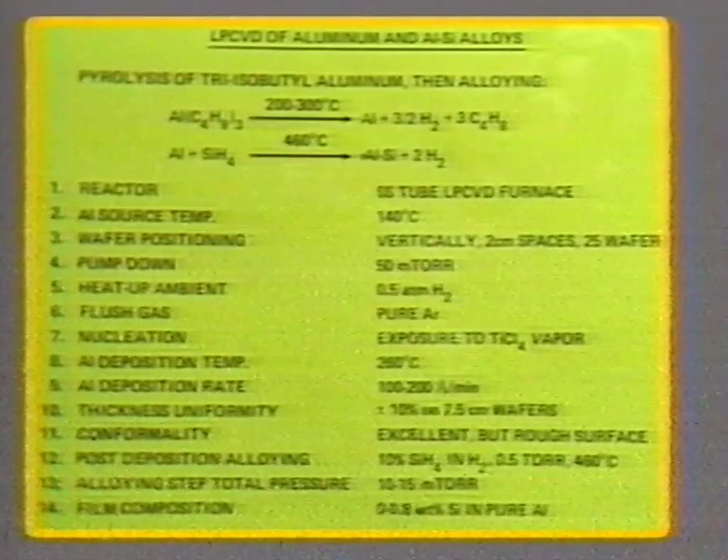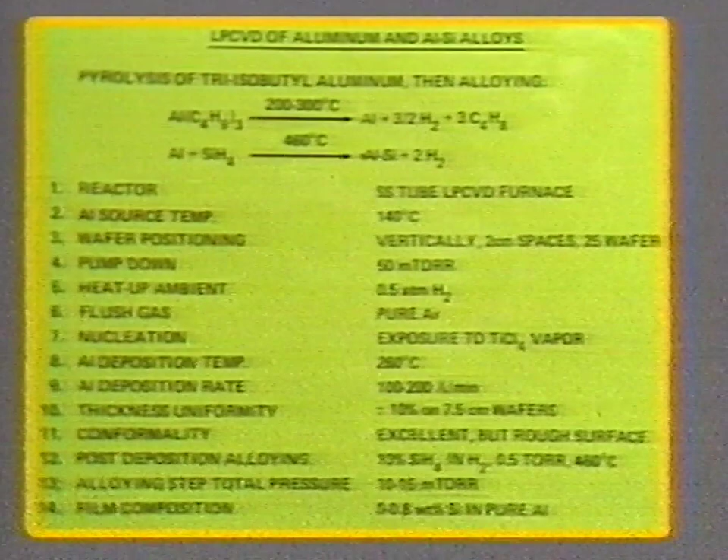The greatest advantage of the whole process is the conformal coverage of the structure, as indicated in number 11. The final composition of the film in this case ranges anywhere from 0 to 0.8 weight percent silicon in pure aluminum, after the doping is done with silane as indicated.

Okay, now we have to look at tungsten. There's an intense amount of activity going on around the world on tungsten deposition. One would think it shouldn't be that difficult, and in principle the chemistry is rather simple and seems straightforward. But to realize a process that works in production with the reliability and controllability we need, additional work is needed. Let's look at the two reactions.

One is a selective deposition of tungsten by reduction using the silicon substrate itself. The reaction shown here uses tungsten hexafluoride reacting with silicon to form tungsten metal and SiF4, which is given off in the gas phase.

The gas mixture typically is one volume of the fluoride to 50 volumes of argon. Temperature is typically 300 degrees C, and it's a very important and sensitive variable. If you go much beyond that, you begin to have non-selective deposition, where the tungsten tends to deposit not only in the silicon areas but all over the structure of the oxide-coated substrate.

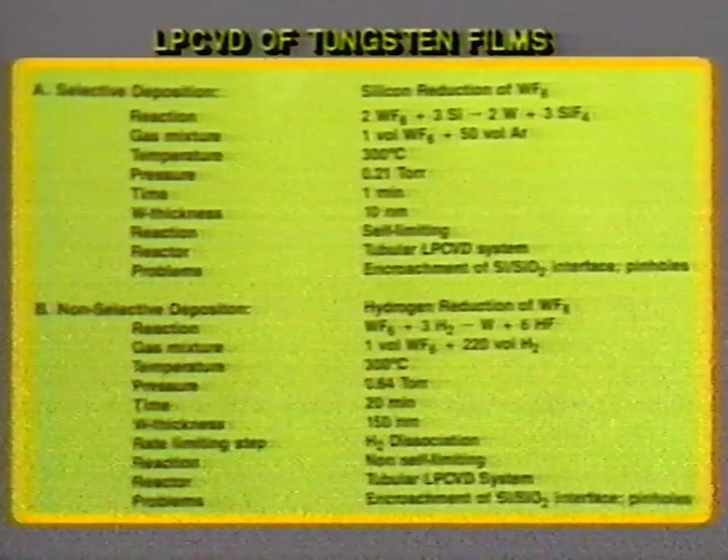So by judicious choice of the reaction conditions, we can produce a film that meets the requirements for high temperature intermetal metallization systems. Let me backtrack for a moment here, and I have a summary of the silicides.

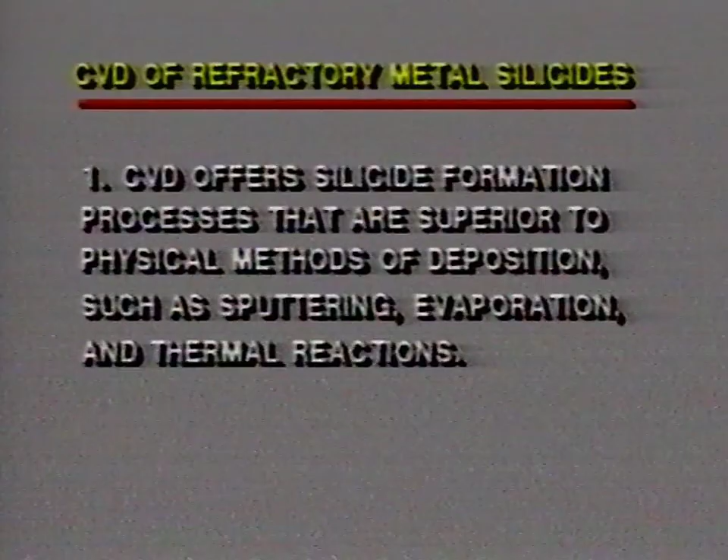Of course, CVD formation of silicides is considered superior to physical methods of deposition such as sputtering, evaporation, and thermal reactions, for a number of reasons. Films with good adhesion can be obtained, excellent step coverage is secured, and the structure of the film itself can be kept under very good control.

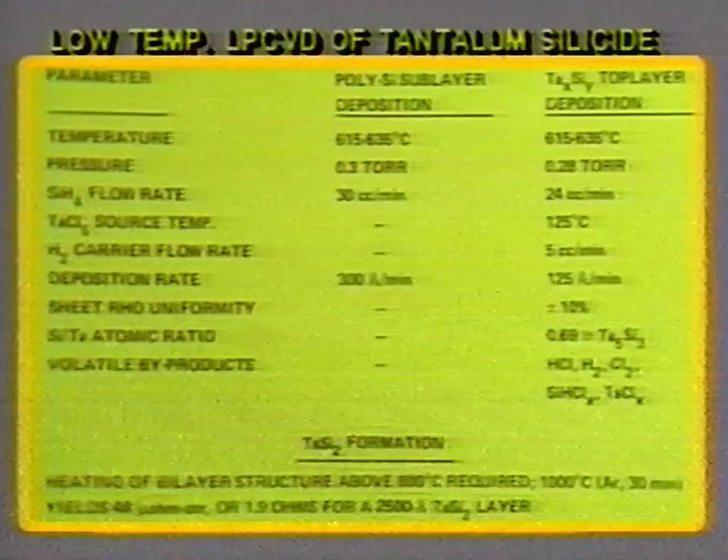Nevertheless, the attractive feature of this type of process is that it can be done in the same reactor under very similar conditions, just by adding one additional component, namely the tantalum pentachloride, to the silane mixture.

The interesting thing here perhaps to point out is that the rate dependence is directly proportional to the tungsten hexafluoride flow rate and is independent of temperature and pressure.

There is one other strange aspect here, namely the effect of tungsten hexafluoride on the silane molecule itself. There is a good degree of evidence that there is a catalysis taking place, namely the tungsten hexafluoride catalyzing the pyrolysis of the silane to silicon, because otherwise we would not be able to run the reaction as shown here. So this actually helps in this case.

Now the resistivity, to give you an idea of the kind of film formed here, the resistivity is in the range of 500 to 900 microohms centimeter as deposited, which can be reduced down to 30 to 50 microohm centimeter after annealing at 1,000 degrees C.

Now, as far as conclusions are concerned, I have a set of some 10 points I'd like to go through very quickly here to summarize this. Now we'll summarize the whole CVD process.

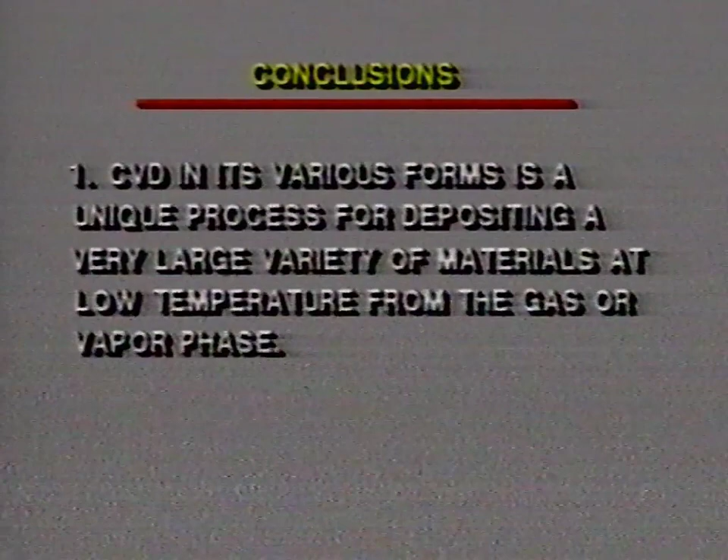We have everything we had discussed in CVD. And as we have seen, CVD is a unique process. That is, we can form materials which we cannot easily or not at all form by other methods of deposition, especially at low temperature. I would say that CVD is absolutely essential for our space-age type solid-state technology needed for the formation of insulators, dielectrics, semiconductors, and conductors, films of very high purity, perfection, and excellent compositional control that are now required. So it is an essential technology that is certainly here to stay.

The CVD processes are essential. Essentially, we can say they are really surface chemical reactions if they are heterogeneous, which is what we like to see, of course, rather than the homogeneous type reactions. And in general, they follow the physical chemical laws of thermodynamics, kinetics, energy transfer, mass transport, and so on. There's nothing peculiar about the type of reactions going on here.

The gas phase reaction, however, is the competing type, homogeneous type of reaction, which must be controlled in order to minimize the undesirable effects, namely gas phase nucleation of particulates and particles that will be a source of contamination. So that is probably the weakest point of CVD, the most difficult one to control on a production scale.

Now, the commercial CVD production reactors that have been designed cover APCVD, LPCVD, plasma systems, and so on, but they are not as yet available for the photo CVD, including laser CVD applications, which is something that will have to await the near future.

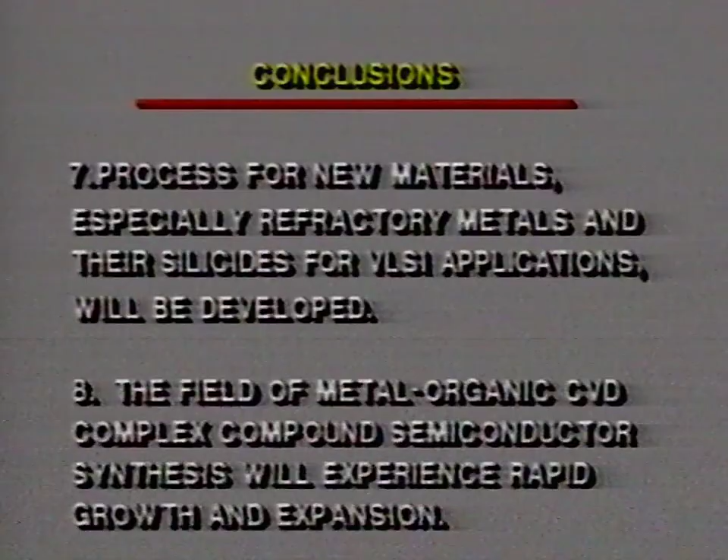In the field of metal organic CVD, complex compound formation for semiconductor synthesis will also be rapidly expanded. I had, unfortunately, no time to really talk about that, but this is a very rapidly evolving technology which is becoming quite important.

As far as limitations are concerned, the fundamental limitations of CVD are essentially the reaction feasibility and the reaction kinetics that govern the CVD processes, and that's really about as fundamental as you can consider it.

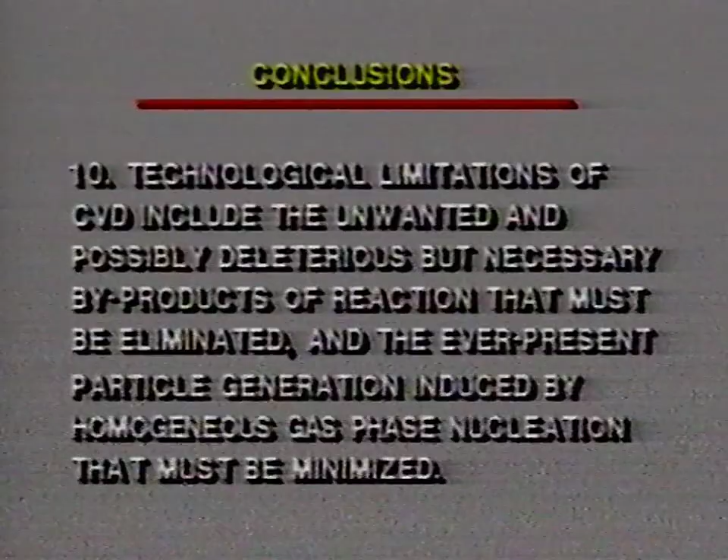The technical limitations, on the other hand, are shown here. They include unwanted and possibly deleterious but necessary side products which are always present, and of course the ever-present particle generation, as I mentioned already, by the homogeneous gas phase reaction that must be minimized. So those are perhaps the limitations that have to be eliminated or at least solved to a better extent than we are now capable of doing.